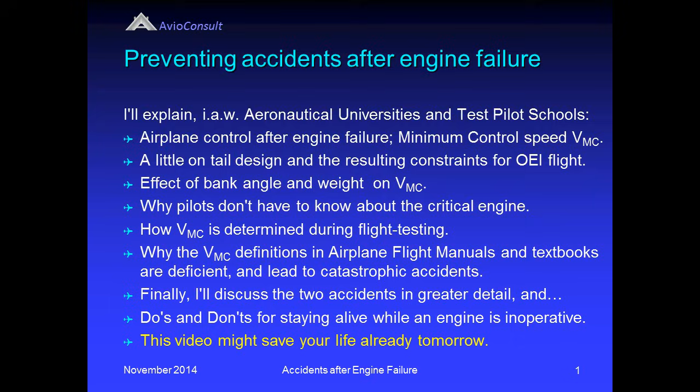Airplane control after engine failure. Federal Aviation Regulations and EASA Certification Specifications 23 and 25, paragraph 149 and equivalent, require a minimum control speed VMC. VMC is the calibrated airspeed at which, when the critical engine is suddenly made inoperative, it is possible to maintain control of the airplane with that engine still inoperative and thereafter maintain straight flight at the same speed with an angle of bank of not more than 5 degrees.

There are two requirements for the magnitude of VMC in this regulation. The first is maintain control, that is recover following a sudden failure, and number two is maintain straight flight during the remainder of the flight while an engine is inoperative. Please notice that there is absolutely no requirement for maintaining control during turns at airspeeds as low as VMC, only for straight flight.

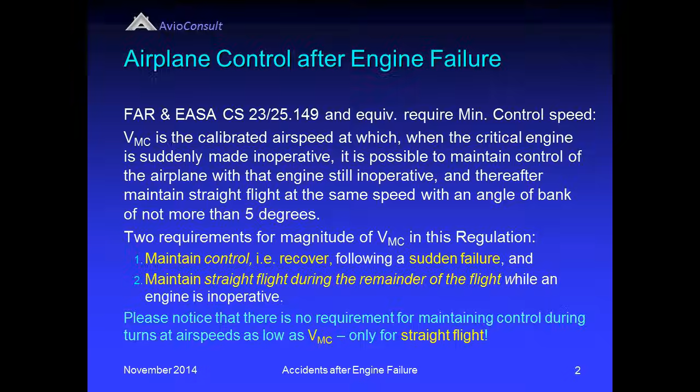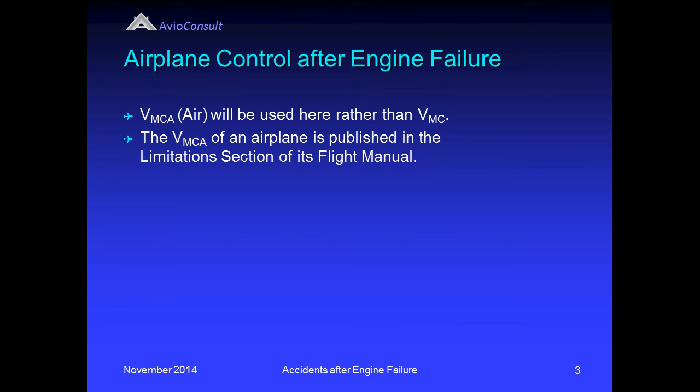VMCA, for minimum control speed in the air, will be used in this presentation rather than VMC. VMCA is more commonly used today to distinguish between other VMCs. The VMCA of an airplane is published in the limitations section of its flight manual. VMCA is also presented with a red radial line on the airspeed indicator or on equivalent electronic displays, or on a placard in clear view of the pilot and as close as possible to the airspeed indicator for heavier and turbine-powered Part 23 airplanes. The blue line speed is VYSE, the airspeed for maximum rate of climb with a single engine. So, VMCA must be an important limitation.

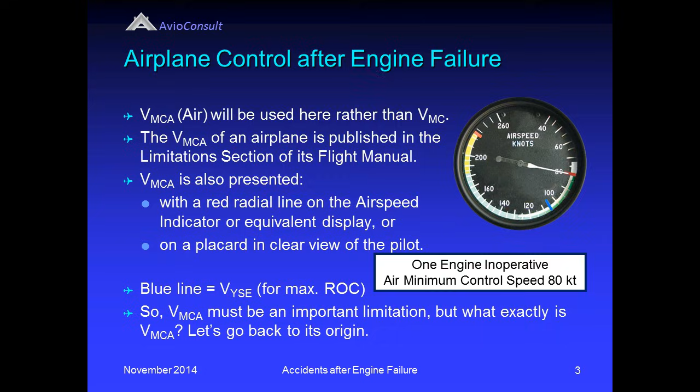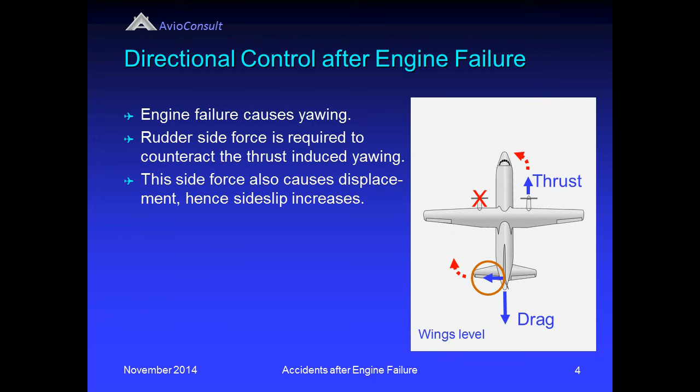But what exactly is VMCA? Let's go back to its origin. Directional control after engine failure. Engine failure causes the airplane to yaw into the failed engine. A rudder side force is and stays required to counteract the thrust-induced yawing moment. This rudder side force also causes displacement to the dead engine side, hence a side slip starts to increase. This increasing side slip results in an increasing opposite side force due to side slip caused by the fuselage and the vertical tail. The rudder needs to overcome this side force too, increasing the required rudder deflection.

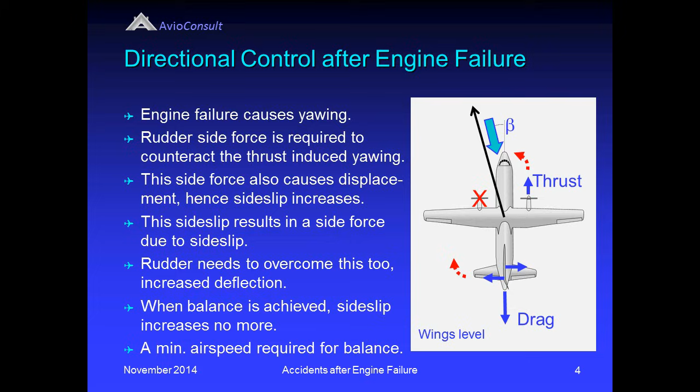When a balance of side forces is achieved, the side slip increases no more. There is a minimum airspeed to generate the required side force for balancing the thrust yawing moment and the side force due to side slip. We'll get to that later.

Lateral control after engine failure. A side effect of yawing after engine failure is rolling due to the increased speed of the good wing and less propulsive lift of the wing section behind the propeller, and less lift of the affected wing because the section of the wing is blanked from the wind by the fuselage due to the side slip. So, aileron deflection is required to recover and to maintain the desired bank angle. The VMCA requirement in the aviation regulation requires the rudder and ailerons to be large enough for counteracting the yawing and rolling moments at an airspeed as low as VMCA.

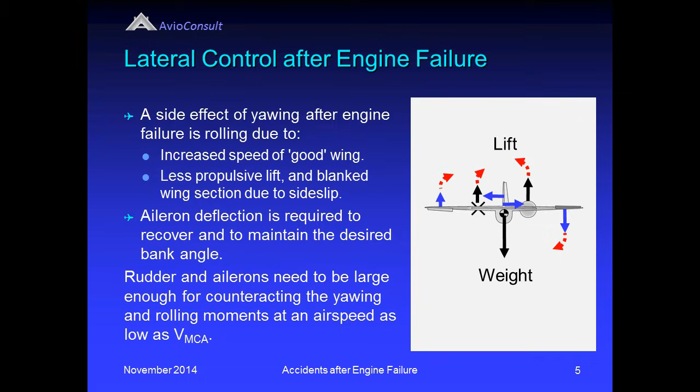When, after engine failure, the wings are kept level, a side slip cannot be avoided. However, side slip causes drag, and drag degrades the climb performance. Especially when an engine fails immediately after liftoff, you need maximum available climb performance, and hence you would select maximum thrust on a good engine and you would like minimum drag by reducing the side slip angle. This can easily be achieved, as I will show you later.

The rudder and the ailerons are the only aerodynamic control surfaces available to the pilot for maintaining an equilibrium, a balance of forces and moments after engine failure.

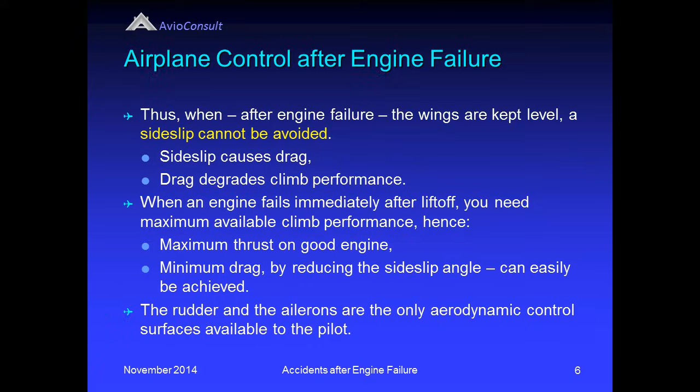A few words on tail design. Aviation regulations require for Part 23 airplanes a VMCA to be less than or equal to 1.2 Vstall, so the tail cannot be made too small. The takeoff speed must be greater than or equal to 1.05 Vmca, a 5% safety margin above the minimum control speed. Operators want a low takeoff speed, that is a low Vmca, to be able to operate from shorter runways or with a higher payload from longer runways, resulting in a large tail.

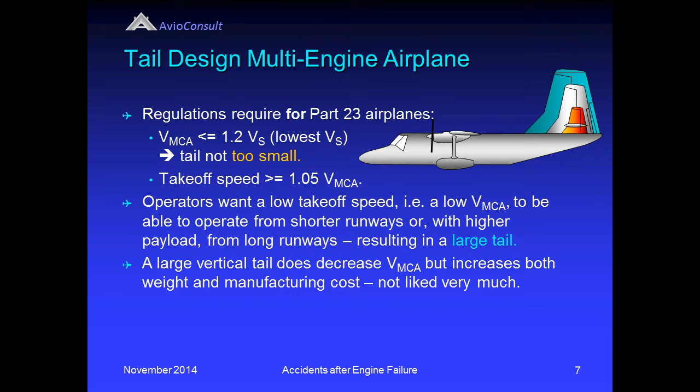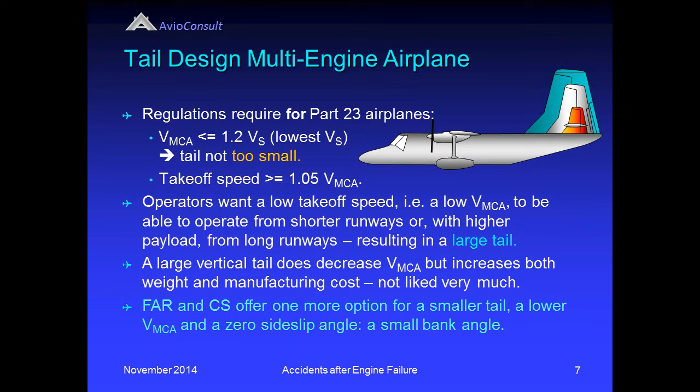A large vertical tail does decrease Vmca, but increases both weight and manufacturing cost, which is not liked very much. The regulations offer one more option for a smaller tail, a lower Vmca and a zero side slip angle, which is a small bank angle.

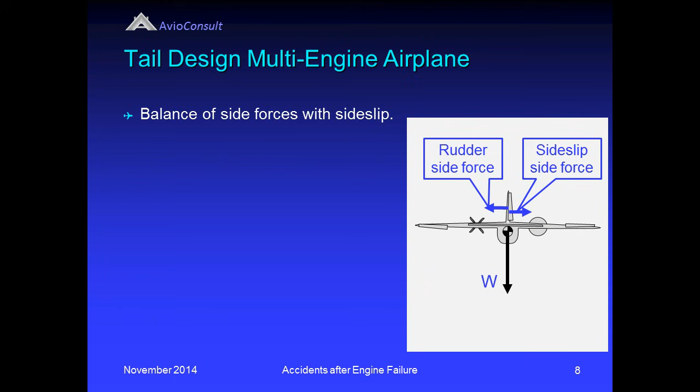The figure shows a balance of side forces of rudder and side slip as mentioned before. With the wings level, a side slip cannot be avoided. Of course, there are many more forces and moments acting on the airplane, but these are the most important ones. When banking, a component of the weight times the sine of the bank angle phi generates a side force in the center of gravity during straight flight. So this bank angle adds a side force, in this example to the right, decreasing the side slip.

The VMC definition in aviation regulations allows the tail design engineer to use maximum 5 degrees of bank, which is of course into the good engine for the balance of forces. A larger bank angle increases the side force to a value higher than the rudder side force, increasing the side slip to the other side, which might cause the vertical tail to stall. This side force due to bank angle replaced the side force due to side slip, hence the drag can become the lowest possible. Remember, side slip angle and therewith the drag varies with bank angle when one engine is inoperative.

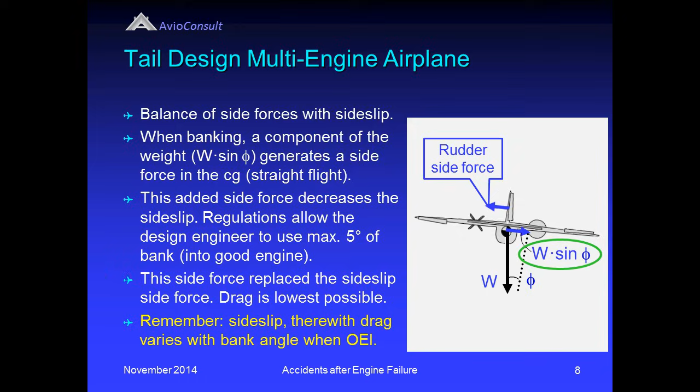The previous slide showed the decrease of side slip, that is decrease of drag with a small bank angle. This bank angle has also effect on the minimum control speed. The design engineer calculates this graph during sizing the vertical tail of this sample airplane. The graph shows VMCA and side slip versus bank angle when the left engine, number 1, is inoperative. When the wings are level, VMCA is calculated to be 120 knots and the side slip is 14 degrees, which means a lot of drag.

For zero side slip, that is minimum drag, the bank angle needed is 4 degrees. VMCA will then be 95 knots. This is the design VMCA of the airplane that will be verified during flight tests. This VMCA is only valid if the bank angle is 4 degrees.

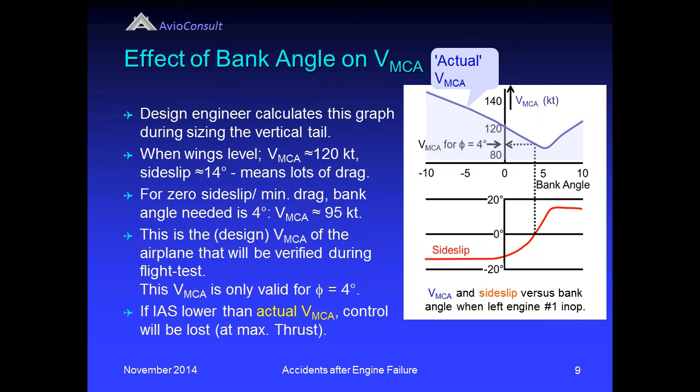This blue line shows the actual VMCA, being the VMCA that the pilot would experience in flight for changing bank angles. The actual VMCA increases when the bank angle is smaller or larger than the favorable 4 degrees bank angle for this sample airplane. If the indicated airspeed is lower than the actual VMCA, the shaded area, the control will be lost at maximum thrust. Dr. Jan Roskam of the Kansas University wrote in his airplane design book on tail design, the VMCA and side slip are tied together by bank angle. This graph shows just that.

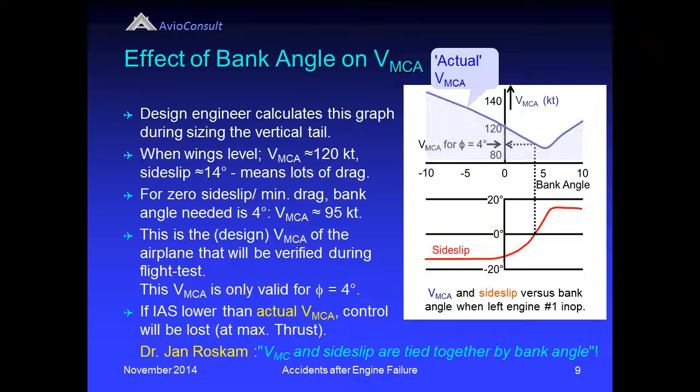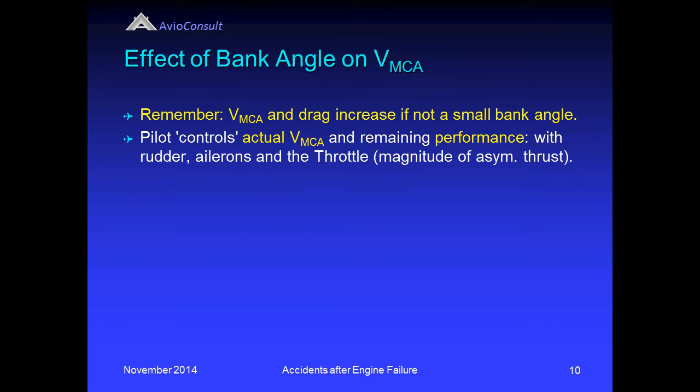Remember, both VMCA and side slip, that is drag, increase if a small bank angle away from the inoperative engine is not maintained. The banking is to the same side as the leg pressure on the rudder pedal. The pilot controls the actual VMCA and the remaining performance with rudder, ailerons and the throttle, the magnitude of the asymmetrical thrust.

If the rudder is not up to maximum for maintaining the heading, we also call that a partial rudder, a higher airspeed is required. The actual VMCA is higher. If the ailerons are not up to maximum to prevent rolling, a higher airspeed is required. The actual VMCA will be higher.

If the airplane keeps yawing and or rolling despite maximum rudder and or aileron, the only option for the pilot to prevent the loss of control is to reduce the thrust just a little. Then the asymmetrical thrust is lower and less rudder is required to counteract. The actual VMCA will be lower. As soon as control is re-established and 5 degrees of bank into the good engine is attained, thrust can be increased again to maximum.

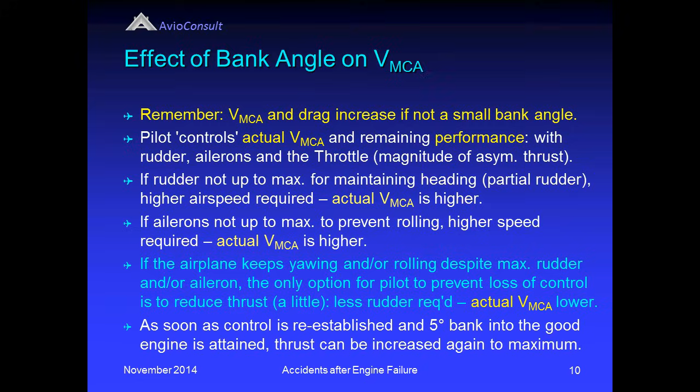Shown here, the green line is the wings level. A straight line because the sine of 0 degrees is 0. Weight has no effect. As an example, 5 degrees of bank into the inoperative engine and 10 degrees into the inoperative engine.

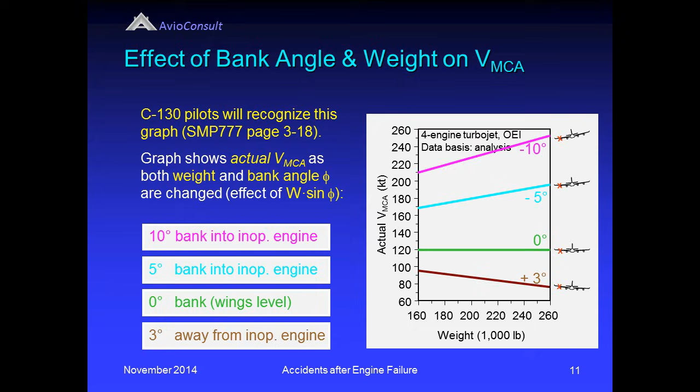A low VMCA is safest, so for lowest overall VMCA, choose the bottom line, bank 3 degrees away from the inoperative engine for this sample airplane. For this bank angle, VMCA is lowest at high weight, but increases along this brown line as the gross weight is lower.

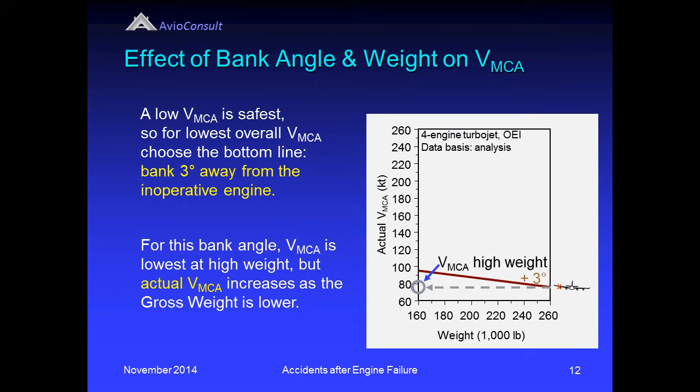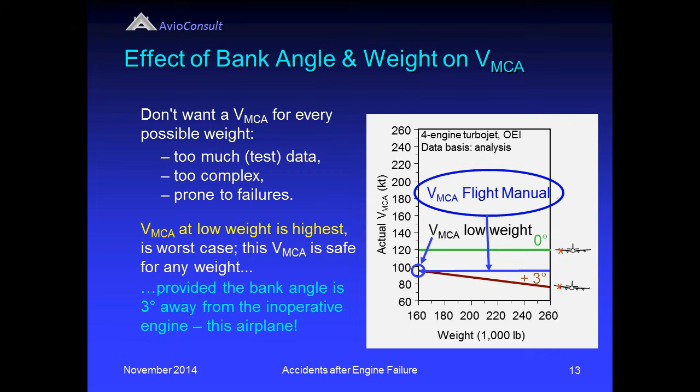We don't want a VMCA for every possible weight. It would mean too much test data, would be too complex to look up VMCA for the right weight, and would be prone to failures. A VMCA at low weight is highest, is worst case. In other words, this VMCA is safe for any weight, provided the bank angle is 3 degrees away from the inoperative engine for this airplane. This is the VMCA that will be published in the flight manual, and that is valid for all weights.

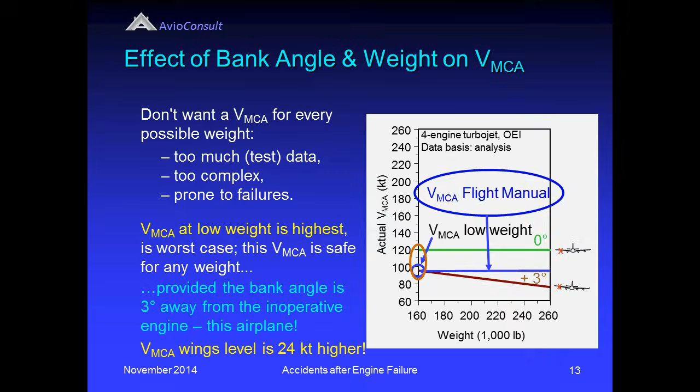VMCA wings level is 24 knots higher, which is less safe at low airspeeds, and in addition, wings level also comes with a considerable side slip, as was shown before as well. Conclusion from the graphs shown. The actual VMCA, that is the VMCA that the pilot would experience in flight, varies considerably with bank angle and weight and is definitely not a constant value.

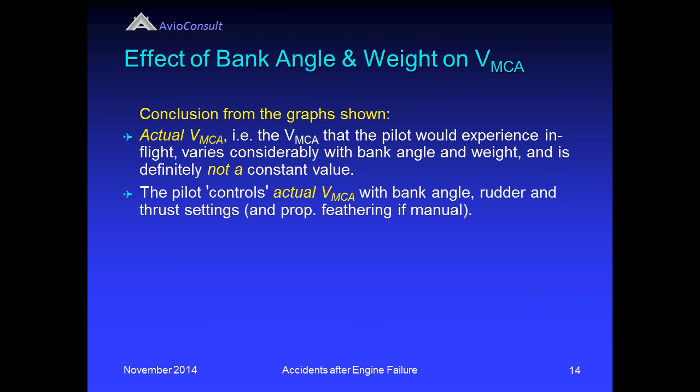The pilot controls the actual VMCA with bank angle, rudder and thrust settings, and with prop feathering if that is manual. The standardized VMCA presented in flight manuals is always safe, but valid only if the bank angle is the same as used for designing the vertical tail while the thrust setting is high and the rudder is maximum. That is, during straight flight only. Any other bank angle increases the actual VMCA.

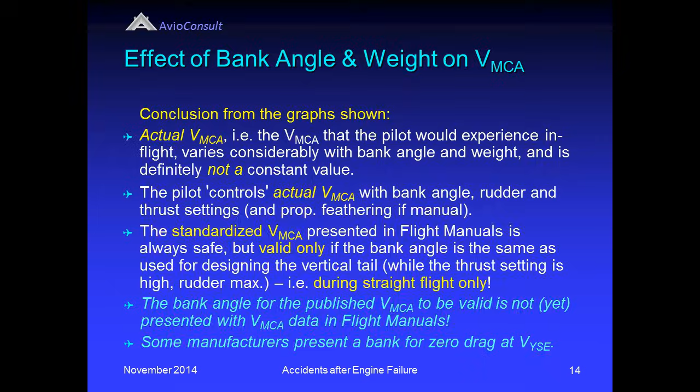The bank angle for the published VMCA to be valid is not yet presented with VMCA data in flight manuals, although some manufacturers present a bank angle for zero drag at the blue line VYSE in performance tables. For pilots to keep in mind, if the small bank angle is not being maintained, the drag is not minimum. Climb performance is less than would be available. The actual VMCA is higher than the redlined or placarded VMCA.

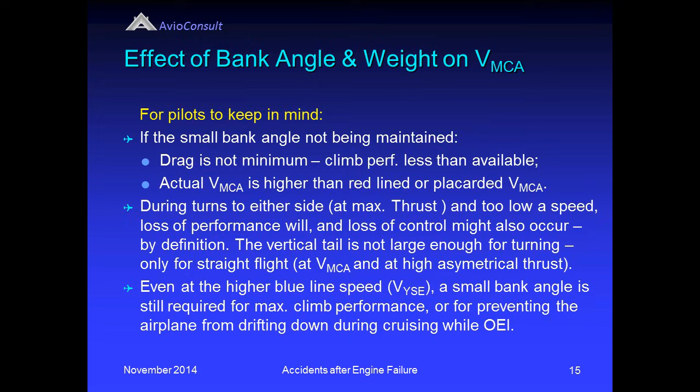During turns to either side at maximum thrust and too low a speed, loss of performance and loss of control might also occur by definition. The vertical tail is not large enough for turning at airspeeds as low as VMCA and at high asymmetrical thrust, but is only large enough for straight flight, which was the requirement in the VMC regulations as I showed you. Even at the higher blue line speed VYSE, a small bank angle, usually 2 to 3 degrees, is still required for maximum climb performance or for preventing the airplane from drifting down during cruising while one engine is inoperative.

We now get to the critical engine. Failure of any engine results in its own VMCA because the thrust is asymmetrical and rudder, hence a minimum airspeed, is required to counteract. Failure of the critical engine results in the largest thrust yawing moment because of P-vector, that is the shift of the propulsion vector in the propeller disc when the angle of attack increases due to decreasing airspeed, and hence a failed critical engine yields a VMCA that is a few knots higher than the VMCA would be after failure of any other engine.

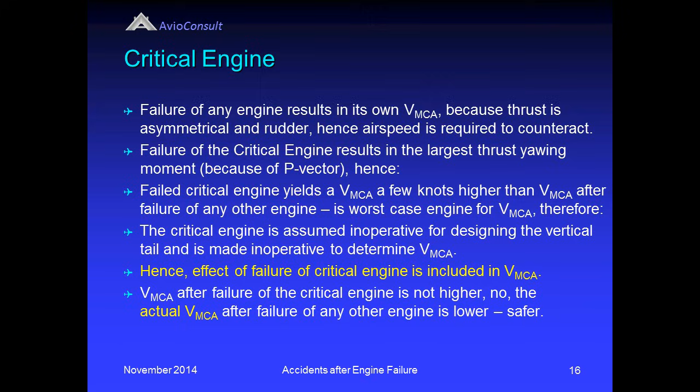So the critical engine is the worst case engine for the magnitude of VMCA, and therefore the critical engine is assumed inoperative for sizing the vertical tail, and is made inoperative during flight testing to determine the VMCA. Hence, the effect of the failure of the critical engine is included in VMCA. VMCA after failure of the critical engine is not higher, as is written in many publications. No, the actual VMCA after failure of any other engine is lower, which is safer.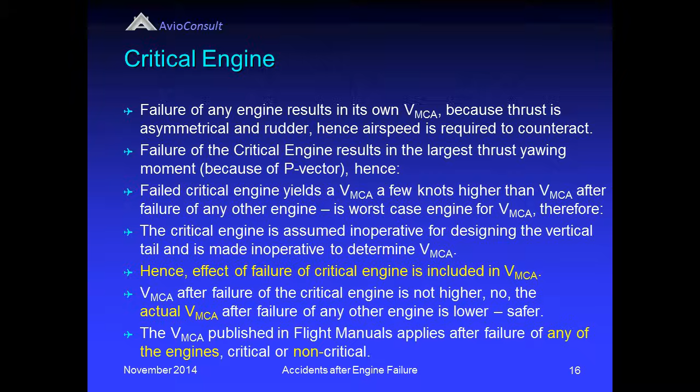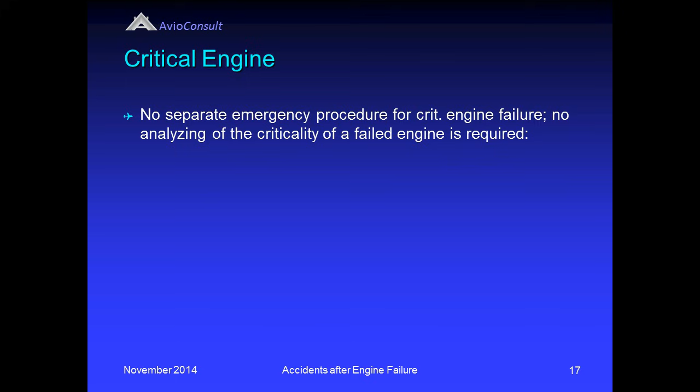The VMCA published in flight manuals applies after failure of any of the engines though, critical or non-critical. Only one VMCA is published. This is safe, provided a favorable bank angle is being maintained. There is no separate emergency procedure for a critical engine failure. No requirement for analyzing the criticality of a failed engine in the cockpit after engine failure.

Critical does therefore not belong in the definition of VMCA in an airplane flight manual, nor in emergency procedures and in textbooks. It's for tail sizing and defining VMCA flight test conditions only, in accordance with the Aviation Regulations 23 and 25. If critical engine is mentioned, then the other factors that affect VMCA even more, like bank angle and weight, should be mentioned in the definition as well. But you won't see this.

It's of no use. Pilots don't need to know about the critical engine unless one of the engines drives a pump for rudder boosting. This can be the other engine than the engine that would be considered the critical engine. Talking about surviving a critical engine failure is for nitwits, not for knowledgeable pilots and accident investigators. That is from now on.

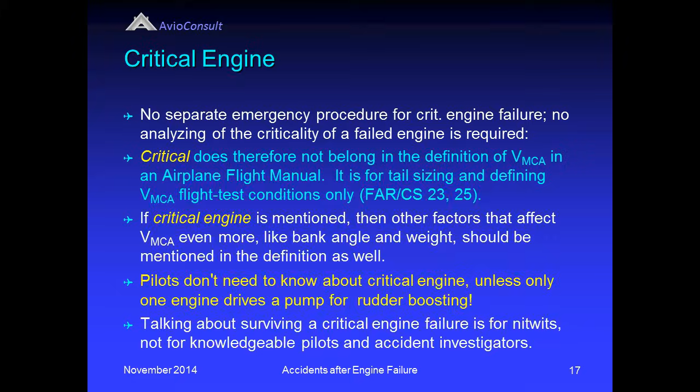Many more factors have influence on VMCA. See my papers. In general, anything that affects the thrust or drag symmetry, that is, for which the balance of forces and moments acting on the airplane changes, has influence on VMCA. A few examples. An idling engine not set for zero drag: the drag asymmetry is increased and VMCA will be higher. A cargo hatch that opens in flight increases the asymmetrical drag, which affects VMCA. This is the worst if on the dead engine side.

The transfer of fuel and/or relocating passengers to the good engine side shifts the center of gravity laterally. The thrust moment arm of the asymmetrical thrust is smaller and actual VMCA is lower, which is safer. Increased engine thrust rating or new, more powerful propellers will result in a higher VMCA. A camera installed, just for fun, on a wingtip affects the asymmetrical drag and therewith VMCA.

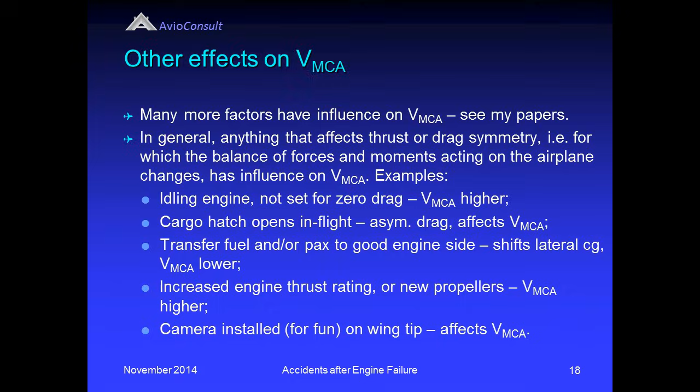Flight testing to determine VMCA. All factors that have influence on VMCA are at their worst case value: low weight, center of gravity aft and into the inoperative engine, etc., because this results in the highest, the worst case VMCA that a pilot would ever experience in flight and is therefore safe for publishing in the airplane flight manual.

Tests are conducted at a safe altitude of 5,000 feet at least and begin at an airspeed higher than the expected VMCA. For new airplanes, we even have parachutes in the seats. The fuel to the critical engine is cut. The propeller, if applicable, feathers if automatic, otherwise will be windmilling. The opposite engine is set at maximum thrust. Both are also worst cases.

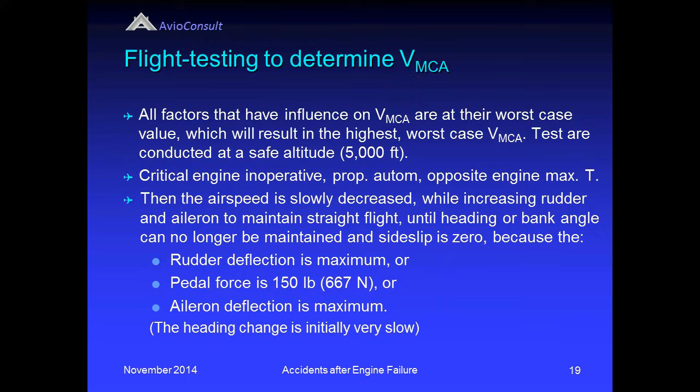Then the airspeed is slowly decreased at a rate of 1 knot per second, while increasing the rudder and aileron to maintain straight flight until the heading or bank angle can no longer be maintained because the rudder deflection is maximum, or the pedal force is 150 pounds, or the aileron deflection is maximum, or the roll control force is the maximum defined. The heading change, by the way, is initially very slow. The airspeed at which this occurs is VMCA wings level.

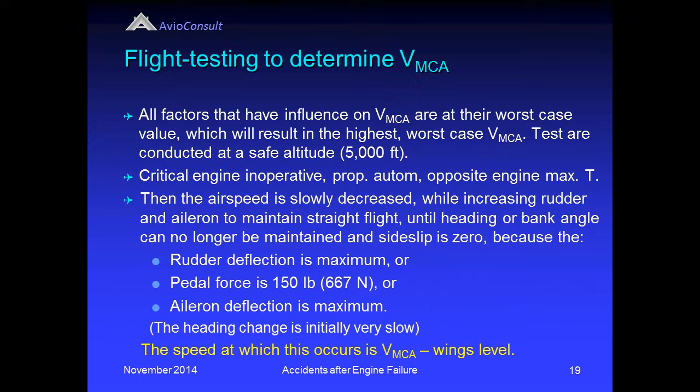In red, this first wings level test point. Then the test continues. This graph, made by the tail design engineer, was shown before. The bank angle is gradually increased to the bank angle for zero side slip as used for tail design, after which the airspeed can be further decreased until, with zero side slip, again one of the rudder and aileron limitations is reached. This is the static VMCA, as was defined in the aviation regulation of VMC.

This static VMCA is approximately 8 knots for a small twin and 30 knots for a 4-engine turbofan, lower than wings level VMCA. These 2 points are the only test points during flight testing to determine the static VMCA.

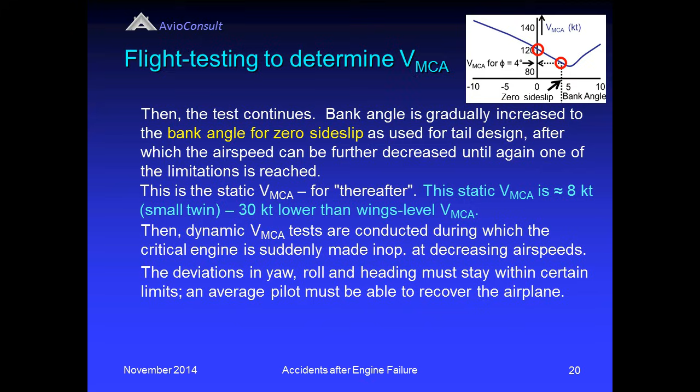But the aviation regulations require another test to be conducted, the dynamic VMCA test, during which the critical engine is suddenly made inoperative at decreasing airspeed test points. The aviation regulations require that the deviations from the flight path in yaw and roll must stay within certain limits, and an average pilot must be able to recover the airplane.

The highest of static and dynamic VMCAs, which is usually the static, will be published in the airplane flight manual as the standardized VMCA of the airplane. This VMCA is always safe, even when the thrust is increased to maximum, provided straight flight with the 5 degrees of bank into the good engine is maintained.

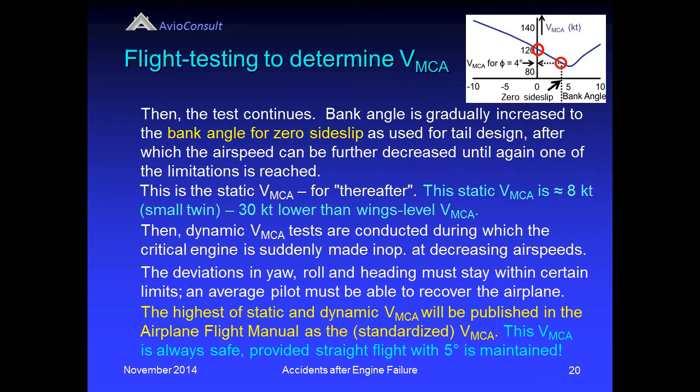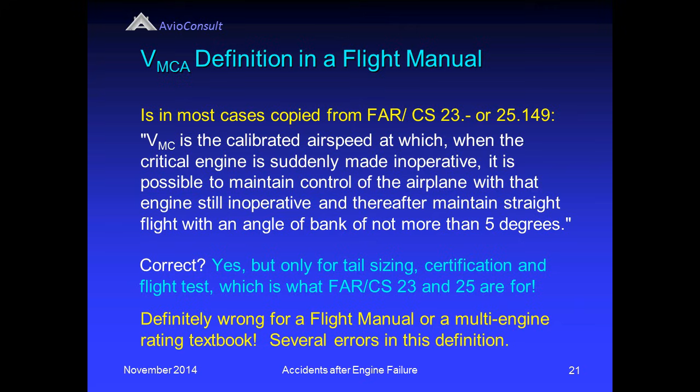The VMCA definition in flight manuals and flying handbooks. This definition was already shown before and is in most cases copied from Design and Certification Regulations 23 and 25, paragraph 149. I will not read it again. Is this definition correct? Yes, but only for tail sizing, for certification and flight test, which is what Aviation Regulations 23 and 25 are for. This definition is definitely wrong for a flight manual, for a flying handbook, or a multi-engine rating textbook. There are several errors in this definition. I will discuss them with you.

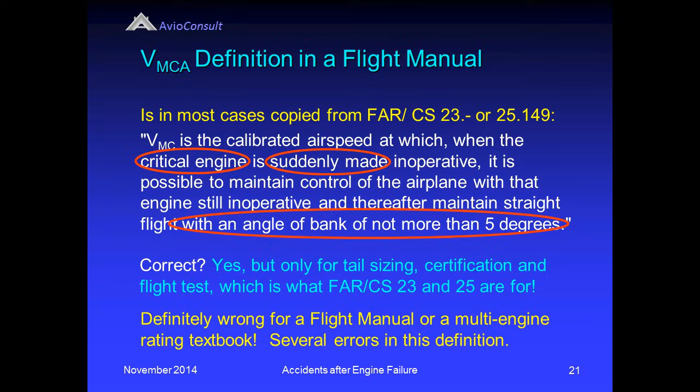First is with an angle of bank of not more than 5 degrees. Does this mean that pilots have to keep the wings level to within 5 degrees either side to maintain straight flight while an engine is inoperative and the airspeed is VMCA? No, definitely not. The vertical tail is designed for and VMCA is determined and is only valid with a fixed small bank angle of 3 to 5 degrees away from the inoperative engine. The number of degrees depends on the airplane type.

The not more than 5 degrees restriction is for the tail design engineer, for sizing the tail large enough to achieve zero side slip and limit the VMCA. This inappropriate copywork led, in my opinion, to many catastrophic accidents following the loss of control or performance, because the pilots did not maintain the favorable bank angle at low speed and high thrust. This inappropriate line is also copied to most, if not all, pilot textbooks and flying handbooks.

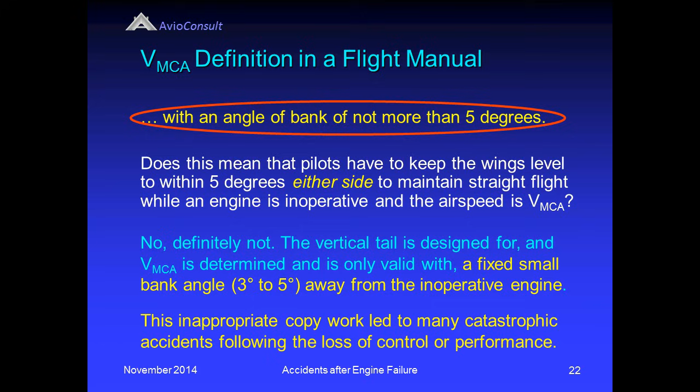Another error, the critical engine. I already explained that VMCA is determined while the critical engine is inoperative. But VMCA also applies after failure of any other engine, but is then actually a few knots lower though. Maybe even less than the difference between high and low weight. Therefore, critical does not belong in the VMCA definition for pilots. Critical engine never shows up in emergency procedures either.

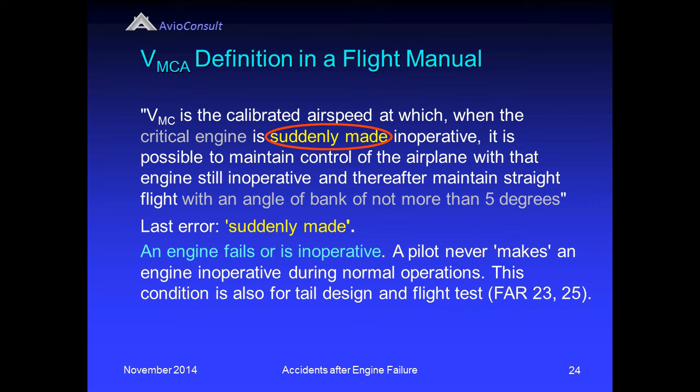Now the last error, suddenly made. An engine fails or is inoperative. A pilot never makes an engine inoperative during normal operations. This condition is also for tail design and flight tests, as in Regulations 23 and 25. Suddenly made does not belong in the VMCA definition in flight manuals and textbooks for pilots. The published and indicated VMCA applies always, whether an engine suddenly fails or is inoperative.

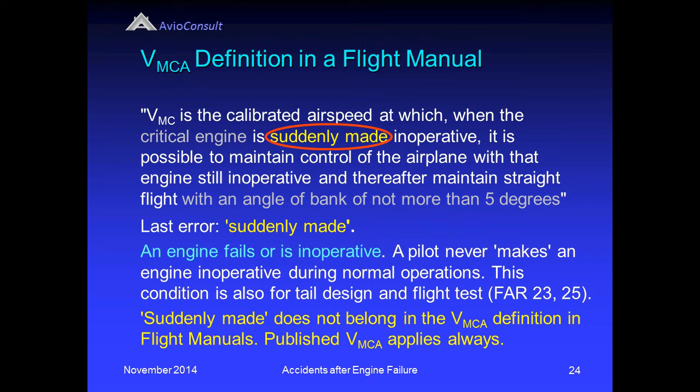Good in this definition is, thereafter, maintain straight flight. But this was regrettably not noticed by many mishap pilots and accident investigators, because these pilots did not maintain straight flight with 5 degrees of bank angle away from the inoperative engine at airspeeds as low as or even higher than VMCA, because they turned to downwind for landing too early at too low a speed, or increased the thrust during the final turn for landing and got killed.

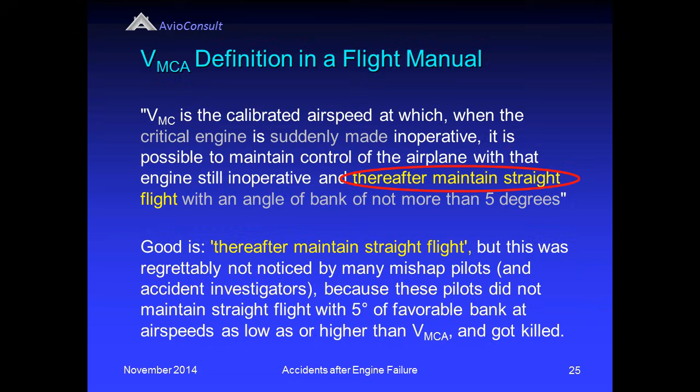Conclusion on this definition. This definition is for design, certification and flight test. It is not for pilots. It is copied inappropriately from design and certification aviation regulations. This definition is inadequate, even deficient for use in a flight manual and in flying handbooks. It is definitely inappropriate for use by pilots. Pilots learn the wrong technique to fly with an inoperative engine at low speed and high thrust setting. This definition does not help to stay alive with a dead engine.

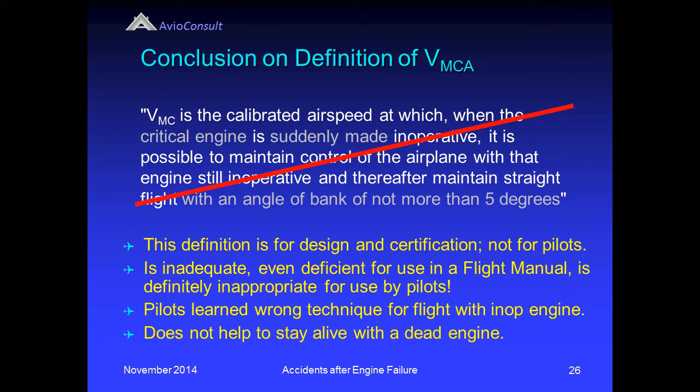An improved VMCA definition for pilots would be: VMCA is the calibrated airspeed at which, when an engine fails or is inoperative, it is possible to maintain straight flight only, provided a small bank angle of 3 to 5 degrees, to be specified by the manufacturer, is maintained away from the inoperative engine when the thrust is maximal. I would add a warning: do not turn at airspeeds near VMCA while the thrust setting is high.

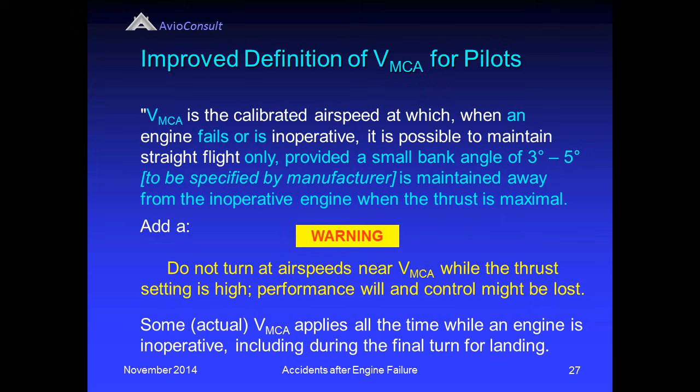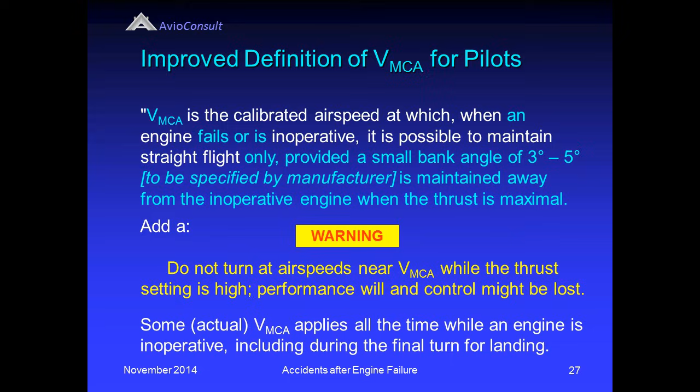Performance will and control might be lost, because some actual VMCA applies all the time when an engine is inoperative, including during the final turn for landing when an engine already failed during takeoff.

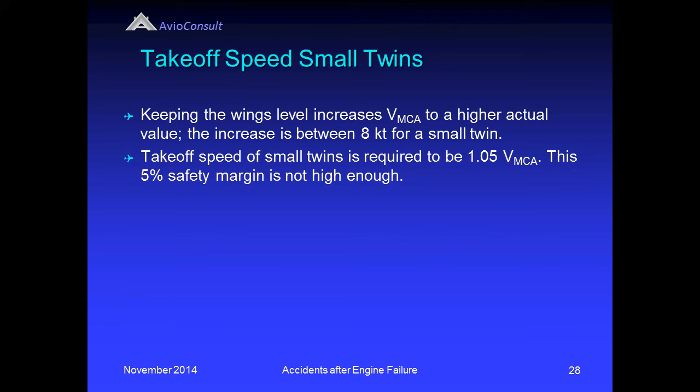Takeoff speed, small twins. I repeat it once more: keeping the wings level increases VMCA to a higher actual value. The increase is approximately 8 knots for a small twin. The takeoff speed of small twins is required to be 1.05 times Vmca. This 5% safety margin is however not high enough. Since the wings are level at liftoff, it is recommended to use at least 1.05 Vmca plus 10 knots as a safe takeoff speed for a small twin.

Ask the manufacturer of your airplane for the wings level Vmca so that you can add a 5% safety margin to that speed. Following engine failure, attaining 5 degrees of bank away from the inoperative engine should never be delayed, because bank angle is required for both performance and control.

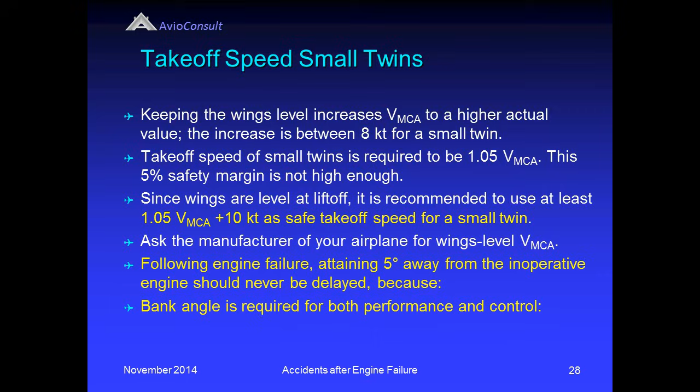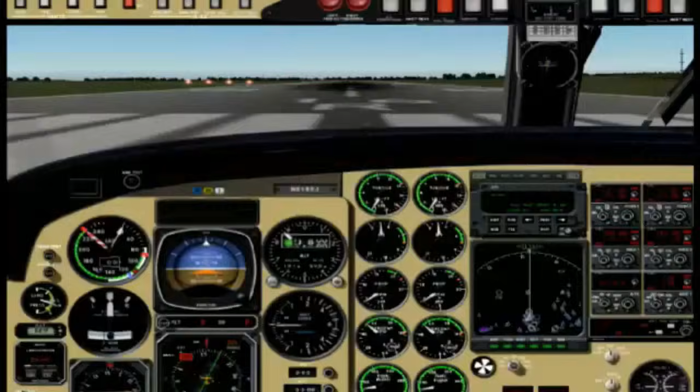We'll now review the two accidents shown in the beginning again and show you what happened. Now the view from inside the cockpit from the left seat. The takeoff run starts. Everything looks alright.

Rotation is at 75 knots, 16 knots below the takeoff speed of 91, 12 knots below the red line Vmca, and even 20 knots below actual wings level Vmca. Right after liftoff, engine number 2 failed at an airspeed of 82 knots, below the red line Vmca. The loss of control was a fact. What went wrong on this accident?

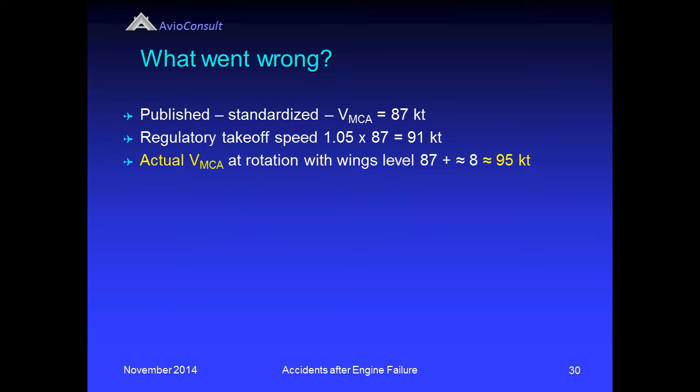The published standardized Vmca in the flight manual was 87 knots. The regulatory takeoff speed would then be 5% higher, that is 91 knots. The actual Vmca at rotation with the wings level is 87 plus approximately 8 knots, that is 95 knots. The pilot rotated early at 75 knots, 16 knots below takeoff speed and 20 knots below the actual wings level Vmca. Way too early. The right non-critical engine failed at 82 knots, 5 knots below Vmca and even 13 knots below actual Vmca. The ailerons were either not maximum or not effective enough at too low a speed.

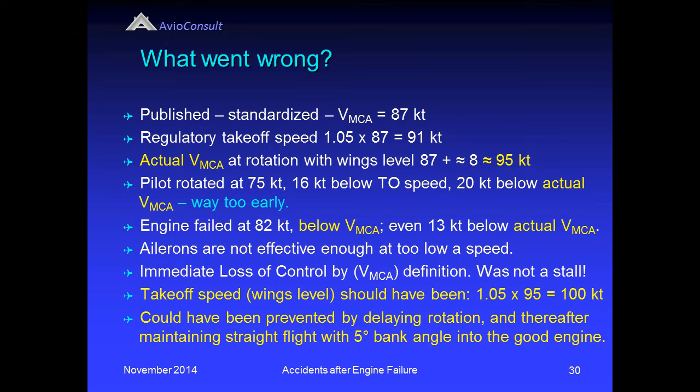There was an immediate loss of control by Vmca definition. It was not a stall. Takeoff speed with wings level should have been 1.05 times the wings level Vmca. That is 1.05 times 95, which is 100 knots at least. This accident could have been prevented by delaying rotation until the airspeed was 100 knots and thereafter by maintaining straight flight with 5 degrees of bank into the good engine.

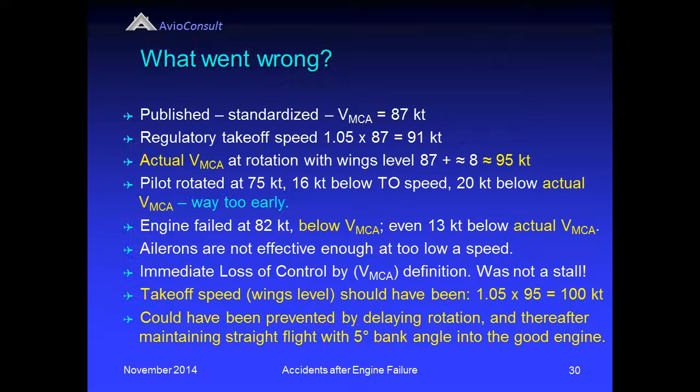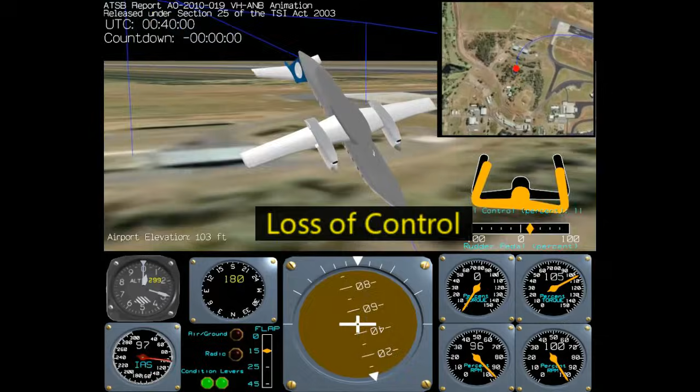What went wrong in this accident? The published standard Vmca was 97 knots, V2 was 113. The actual Vmca was 112 knots, because the video showed that the yawing started slowly. The actual Vmca was higher than the standardized Vmca because the 5 degrees of favorable bank angle into the good engine was not attained by the pilot.

And because the throttle number 1 was closed, propeller 1 did not auto-feather. In addition, the torque was not set for zero thrust, which increased the thrust yawing moment, both increasing the rudder requirement or requiring a higher airspeed.

What the accident investigation report did not mention is that the yawing started while the indicated airspeed was V2. V2 was obviously not a safe takeoff speed. Takeoff speed V2 requires a favorable bank angle too.

The indicated airspeed was allowed to decrease below both V2 and the actual VMCA, so the loss of control occurred by VMCA definition. The pilots and the accident investigators were not familiar with the true value of VMCA and the accompanying constraints. This accident could have been prevented by maintaining straight flight with a small bank angle into the good engine, even at takeoff safety speed V2. V2 on this airplane requires an increment to make it a safer takeoff safety speed.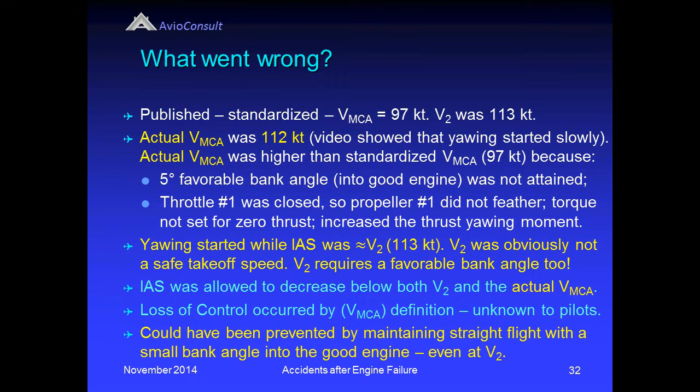The following VMCA definition was found in the Flight Operations Manual of this airplane. VMCA is the minimum flight speed at which the aircraft is controllable with a maximum 5 degrees of bank towards the operative engine when one engine, critical engine, suddenly becomes inoperative with the remaining engine operating at takeoff power. The value presented represents the most critical combination of power, weight and center of gravity. In aircraft with auto-feathering, VMCA is calculated with a feathered propeller.

A few remarks on this definition that should have been made by knowledgeable accident investigators. The airplane is not controllable with a maximum 5 degrees bank angle, but can only maintain straight flight at VMCA with maximum power setting. This is just the definition. VMCA is not for when one engine, the critical engine, suddenly becomes inoperative, but VMCA applies after failure of any one of the engines, critical or non-critical.

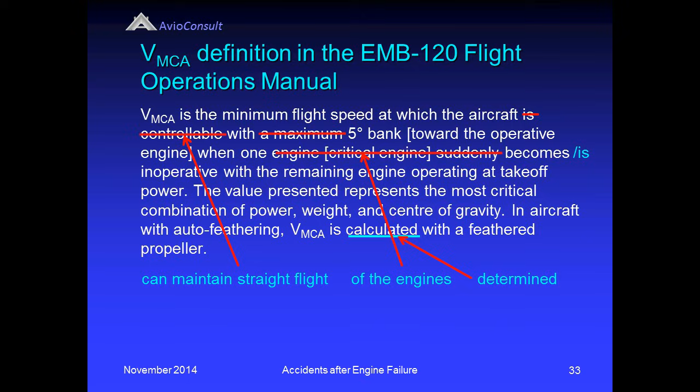VMCA is not calculated, but is determined, that is measured during flight test. VMCA is measured with the propeller in the position it assumes after engine failure. If equipped with an autofeather, that system is used, otherwise the propeller is windmilling. The last sentence should not be included in the definition, although it could be added that an inoperative autofeather system increases the actual VMCA. This definition, like most VMCA definitions in flight manuals, is definitely not correct for an airplane flight manual for pilots. This definition is not in agreement with design and flight test method and conditions and does not contribute to preventing catastrophic accidents as was shown here.

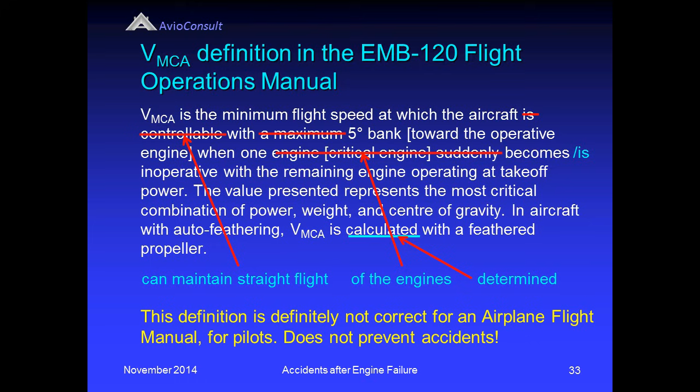A few do's and don'ts. Always delay rotation until the indicated airspeed is at least 10 knots higher than the takeoff speed. After engine failure, bank 5 degrees as soon as possible to the same side as the rudder pressure. Always maintain straight flight until reaching a safe altitude. Maybe that should be at least 1000 feet. When a turn is required, reduce the asymmetrical thrust and the rudder a bit and make a shallow turn. You might lose some altitude because of the drag.

When the rudder is near maximum, the actual VMCA and the loss of control are close. Increase your speed. Before increasing the thrust to maximum, when the airspeed is low, bank 5 degrees again into the good engine. During cruise with one engine inoperative, fly VYSE plus bank 2 to 3 degrees for minimum drag and for minimum descent. A long straight-in approach is much safer than increasing the thrust during the final turn for landing for maintaining the approach path. When the airspeed is low, never ever increase thrust to maximum without banking 5 degrees into the good engine first and thereafter maintain straight flight with that bank angle. Increase the rudder and the ailerons with the thrust.

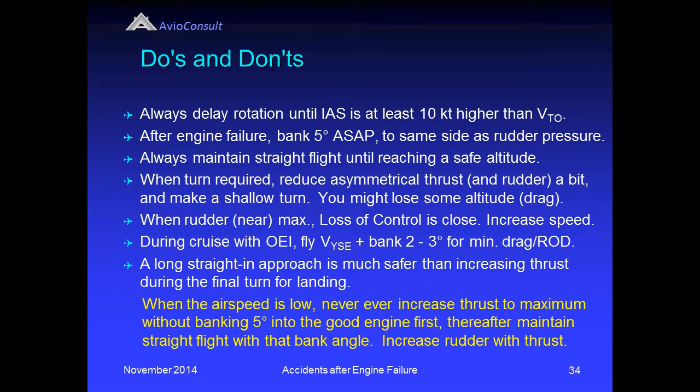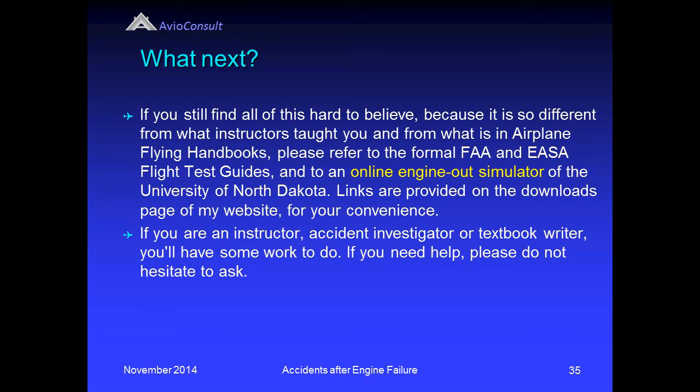What next? If you still find all of this hard to believe because it's so different from what instructors taught you and from what is written in airplane flying handbooks, please refer to the formal FAA and EASA flight test guides, and to an online engine-out simulator of the University of North Dakota. Links are provided on the downloads page of my website for your convenience. If you are an instructor, accident investigator or textbook writer, I guess you'll have some work to do. If you need help, please do not hesitate to ask.

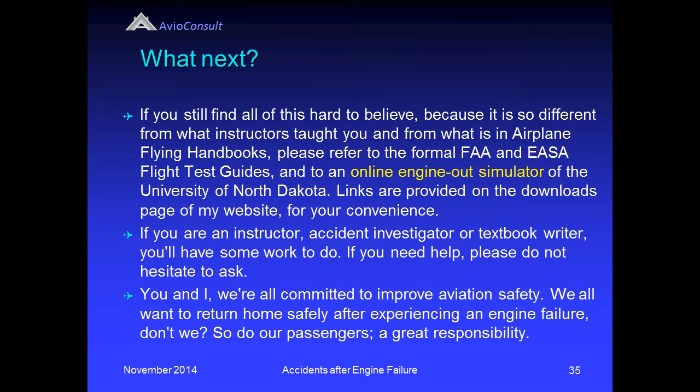You and I, we're all committed to improve aviation safety. We all want to return home safely after experiencing an engine failure, don't we? And so do our passengers. A great responsibility rests upon our shoulders.

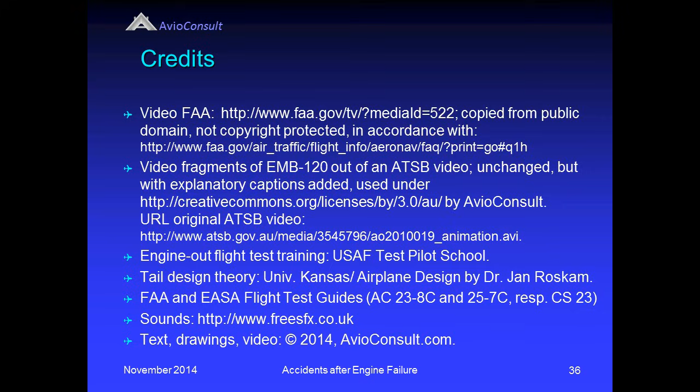The final question: can you prevent a dead engine from turning into a killing engine? Sure you can, but you should know and not forget about the air minimum control speed and respect it just like you do respect the stall speed of your airplane.